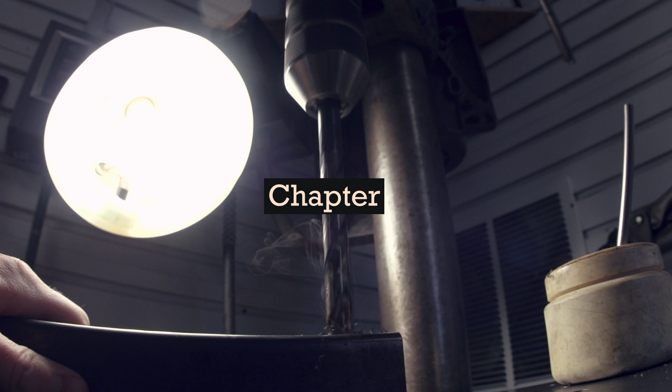I've come to realize something about myself. I'd be curious to know if you can relate. Here's what it is. Things become more valuable to me for two reasons mainly. One is if I put effort into them. So if it's something that I make, or if it's something that I fix, something that I own and have to fix, as I put that effort in, it becomes more valuable to me.

The second way is maybe even if I don't have to fix it, if it's a purchased item, but I've had it for a long time, then it becomes more valuable to me. So it's effort and time. A good example is my pocket knife, right? I made this thing 4 years ago, and you can watch the video of that right here.

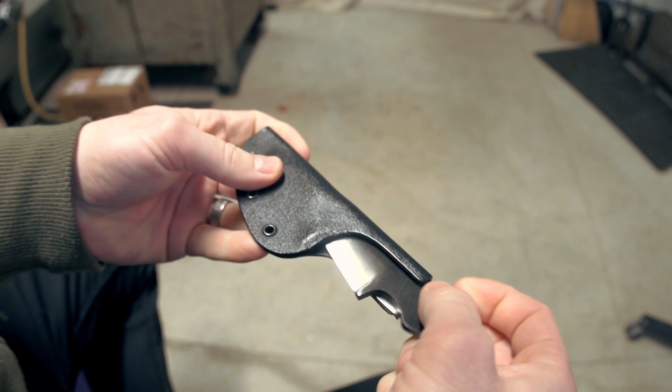I just love it. It is slim. I love the shape of it. I mean, I cut out the shape of it, and I've been using it as my sole pocket knife for the past 4 years. After 3.5 years, the sheath wasn't really holding the knife in there as well anymore.

So I just heated up this little section right here and pushed it down a little bit so it engages with the knife a little bit better right here. And now it holds it better than it ever did, okay? So even when I have issues, it's just an opportunity to put a little bit more effort into this thing and make it just a little bit better and tweak it a little bit more, and now it's even better, even though it has some cosmetic wear and stuff. All that stuff actually gives it value to me.

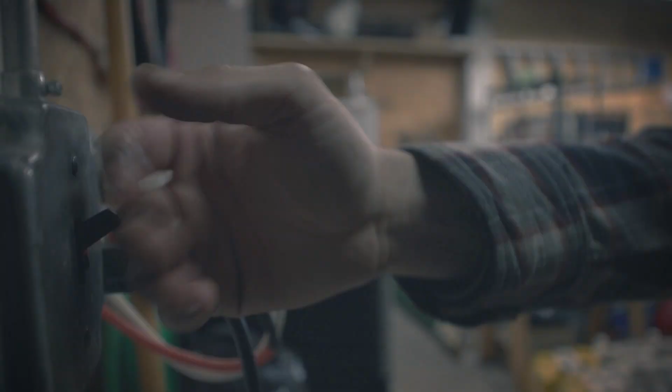Okay, here's another example, something I didn't make. This is the head of a lamp that for most of the last 10 years has lived its life clamped to my workbench right above my vise. Okay, so that's 10 years.

Let's go back 23 years and we find that when child me broke my foot, this lamp was there. What was it doing back there? Well, you know, it was also there at Christmas when I got my new Carhartt and my boots. And there it is, right in the background, providing life-giving heat to my pet iguana.

All right, now let's go 25 years. This lamp sitting on my childhood drawing table. I meticulously cleaned my RC cars with cotton swabs under this lamp. Now, obviously to me, this lamp has just always been around. So I texted my mom and I asked her, where did this lamp come from? 50 years ago, my mom got this lamp from her mom as a Christmas gift.

Now, not fully understanding the scale of how long this thing has been in my family, I recently took the head off of it, clipped the cord, threw the rest in my scrap bin, mounted it to my drill press, wired it in, put a new fluorescent ring light in it because I broke that years ago, and turned it on and it flashed bright once and never made light again.

Then I got to thinking, maybe there were some critical components in those parts that I pitched. So I dug through the scrap bin, did some disassembly, and I found this. Now, one wire was tied to one of the AC line wires and the other wire was tied to a green wire, which is curious because when I wired this lamp to my drill press, I took this green wire and I connected it to ground because green ground, right?

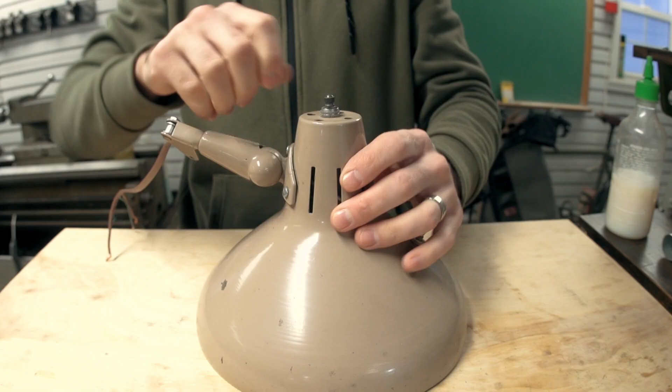So I went down a YouTube rabbit hole trying to learn about how fluorescent lights work to figure out what this thing is. And it turns out this thing is the ballast. Kind of important. Okay, so let's dig in a little bit here. I could just wire up the ballast and try it, but I think we might be able to learn more.

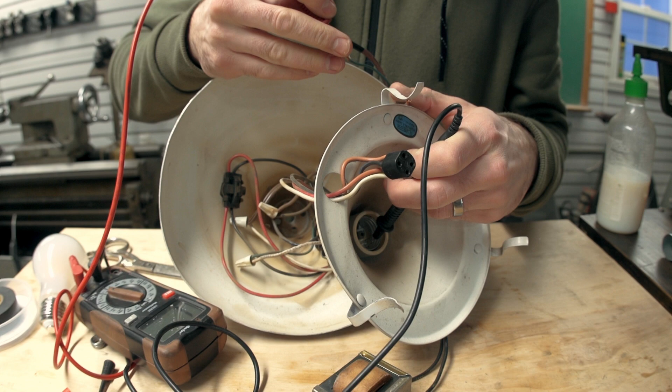So what I'm doing here is I'm just kind of studying these wires. I remember that the ballast here was tied into this green wire down on the other end of the cord, and so I'm looking at where this green wire is attached to. Yeah, I was running that center light just on the ground instead of the neutral. Oh.

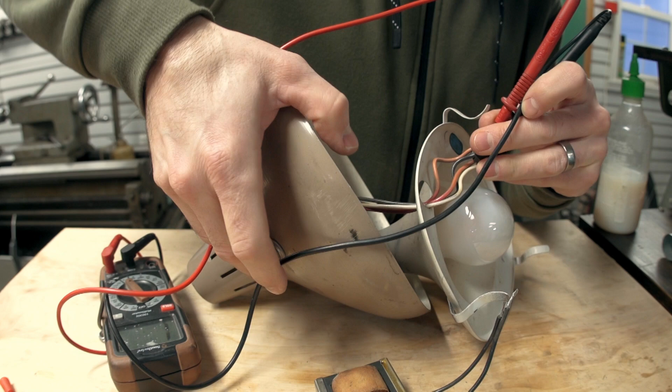There's continuity between the red wires when the push button is held down. So what is that push button switch doing? I figured it out and I drew you a wiring diagram. This push button switch, when you push it, it does two things kind of. You push it down, and when you hold it down, you're making both of these contacts, okay? So for electricity to flow, I push the button once and I'm holding it down.

What am I doing? Electricity is flowing through this filament, back through the switch, and through this filament, and then through the ballast, which is just basically a big coil of wire. Through the coil, and then out. I'll talk about this in a second. What you're doing is you're heating up these filaments, so you're kind of preheating the environment inside of this bulb, which is gonna help it light.

So then when we let go of this button, this one, after the first push, stays latched, and this one springs back. So now for electricity to flow through this, it has to go to the filament and then go through the ether inside this bulb to the other filament where it can then get to the ballast and go out. Now let's push the button again.

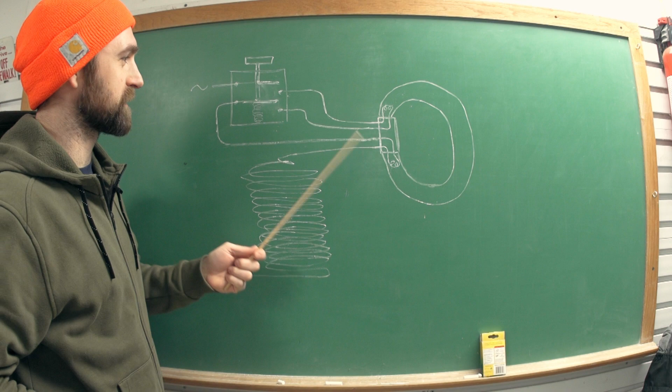We push it down, this one makes contact, we're heating the filaments again, but we're turning it off, so we're not gonna push and hold it, we're just gonna push it down and let it go, and then this one unlatches, and this one always is just springing back when you let go. All right, so now both of them are disconnected, so power can't flow through this circuit at all, and the lamp goes out.

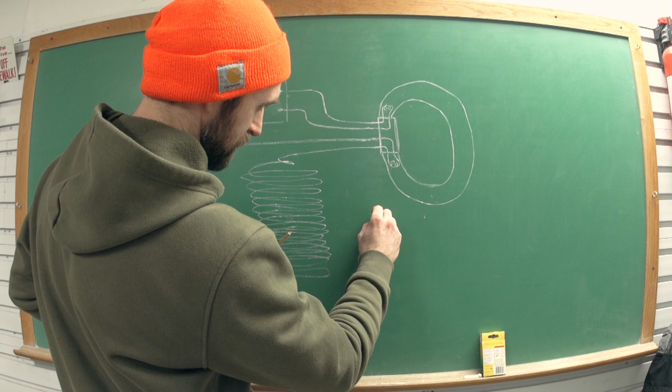So we talked about the ballast being a resistor because it's just a big long wire. Another thing that it does is create a magnetic field, which is switching back and forth 60 times a second. And when you cut power to that magnetic field, especially when it's at its strongest, we got the sine wave of electricity. If you happen to let go of that button right at the top of that wave, that's what you're going for. You get the maximum amount of energy when that magnetic field collapses. It sends a high voltage spike out into the world, and that spike goes to the filament and helps ignite this. It helps start the lamp.

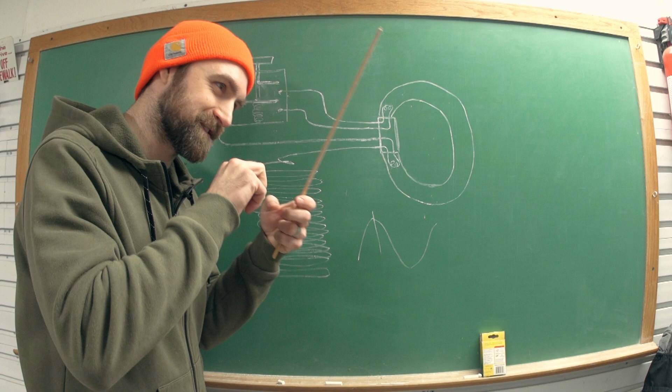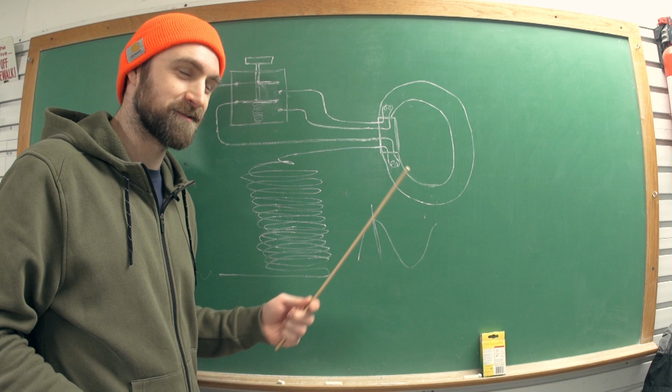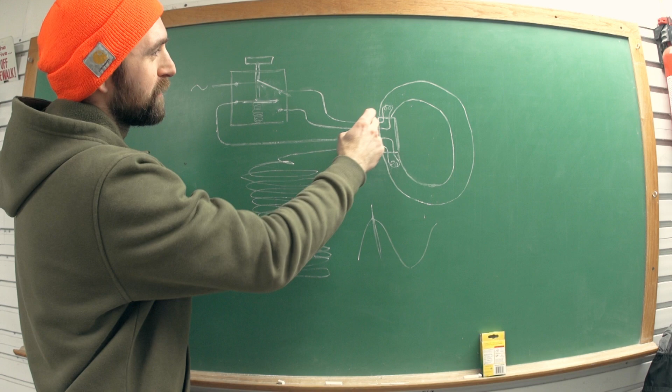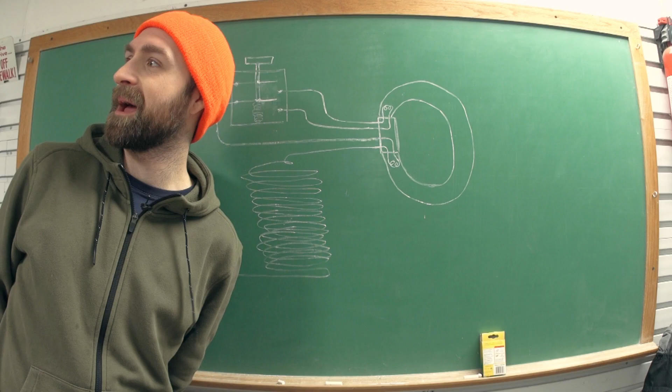This is pretty fascinating to me, and it's got to be the most bare bones way to wire a fluorescent light, and it's definitely an old way. I love the simplicity of it, and I'm happy to have learned it. Thanks for the opportunity, old lamp. I'm gonna put this all back, wipe it out a little bit, put it all back together, wire in the ballast, and yeah, cross our fingers, and I hope it works.

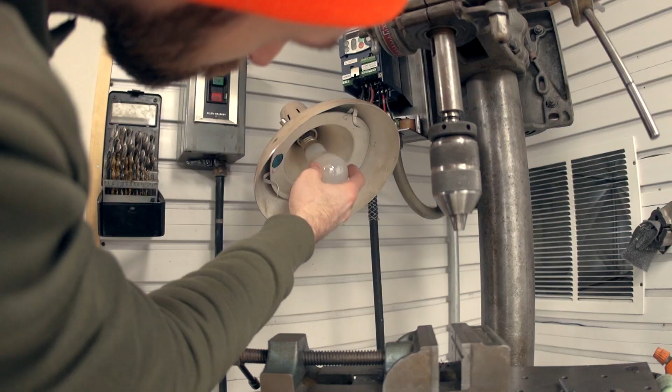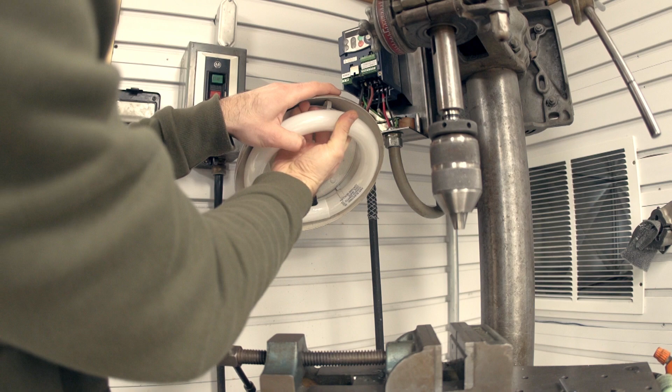Okay, so here's the moment of truth. Whew, I'm nervous. I'm gonna give it power. Okay, we got the center light. Is the fluorescent light gonna work? I can hear the ballast buzzing. Oh yeah, that's nice. Wow, that thing really buzzes.

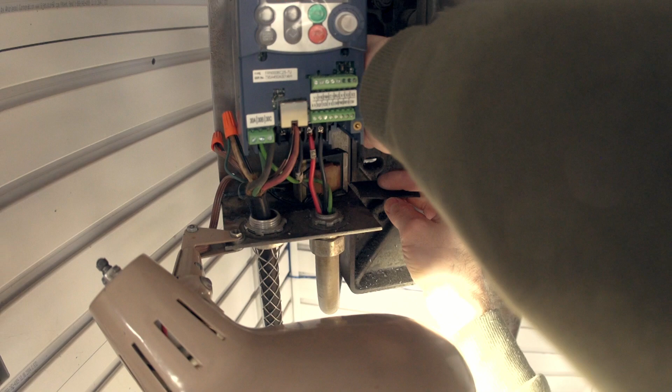Okay, I have this piece of motorcycle tube. I just want to give that ballast a little soft place to sit so it doesn't buzz so much. I mean, that'll work right there. Still makes a buzzing noise. The buzzing noise really is just part of the fluorescent experience.

I freaking got it, man. I got the light working. I'm so excited. Oh. And see now, not only has this been in my family 50 years, I've now put a little effort into it and learned about how fluorescent lights work in the process.